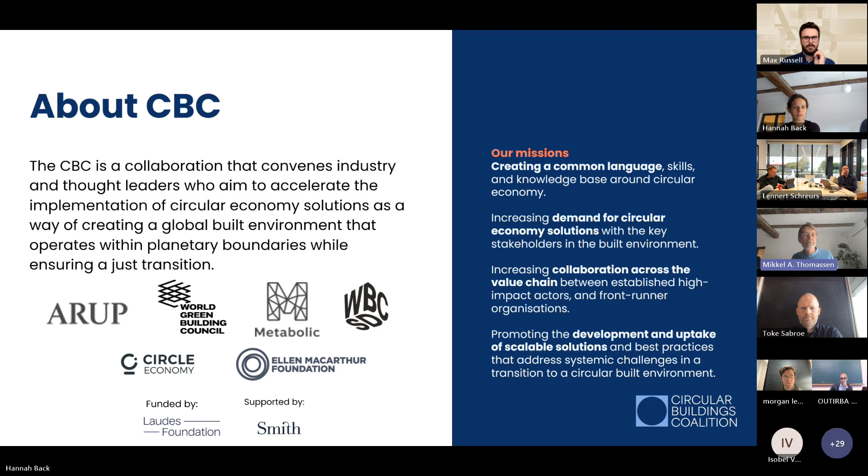If you go to our homepage, you'll see we've been trying to do this by various means. One of them, particularly prominent in the first phase of the Circular Buildings Coalition, was simply to collect data, building the argument for why circularity is important. You'll see this in particular in the 4 Circular Building Pathways reports, where we have really tried to put numbers to different strategies for circularity and how that can improve the well-being of the planet, with a particular focus on carbon.

We have also been doing reports digging into some of the harder problems to address, where the systemic challenges really get tough. So you'll also see some deep dive reports, as mentioned to the right of this slide. That is one part we've been doing in the Circular Buildings Coalition.

Another part, a very important and dear part to us, is not only to talk about the problems and give a general overview, but actually also to demonstrate that solutions are around, and very often that a lot of the assumed barriers to circularity are not necessarily real. There are actually solutions to a lot of the perceived problems, and so also instilling hope and moving things forward. It is very important for us as part of the CBC to support bottom-up initiatives, to support frontrunners, showing that there are real solutions to real problems.

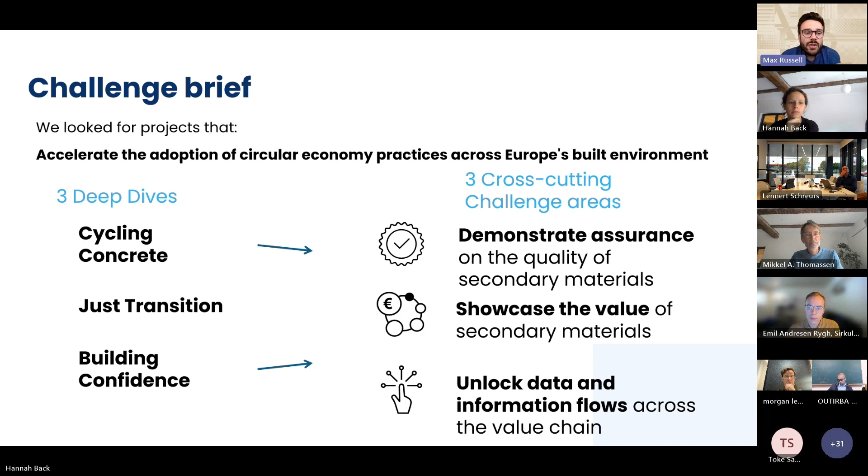Building on some of the foundational work that earlier phases of the Circular Buildings Coalition carried out, looking at material flows and other systemic barriers for circularity in the built environment, this phase we had the desire to go further, to go deeper, to really understand in more detail where some of those pressure points and challenges are. You can look on our website—we developed 3 deep dives: one based on insurance models, one looking at concrete, and one looking at the just transition.

And so through those, we consolidated and developed these open calls, recognizing that there are really great pockets of innovation already within Europe, and wanting to identify, support, and shine a light on some of the really cool initiatives doing excellent work in this space—again, really trying to help unlock circularity at scale.

So those 3 challenges that were highlighted were based on some of the research we carried out, as well as engagement with a variety of different actors and stakeholders across the built environment, to help consolidate this thinking into the open call brief that was launched at the start of this year. So as a recap of what those 3 challenge areas were, the first one being demonstrating assurance on the quality and reliability of secondary materials.

Now, this is really looking at the perceived risk of secondary materials. The question of, is secondary as good as new? What happens if the reused component breaks? What happens with that? How can I be sure? What's the assurance that I can have to ease that perceived perception on the quality of secondary materials?

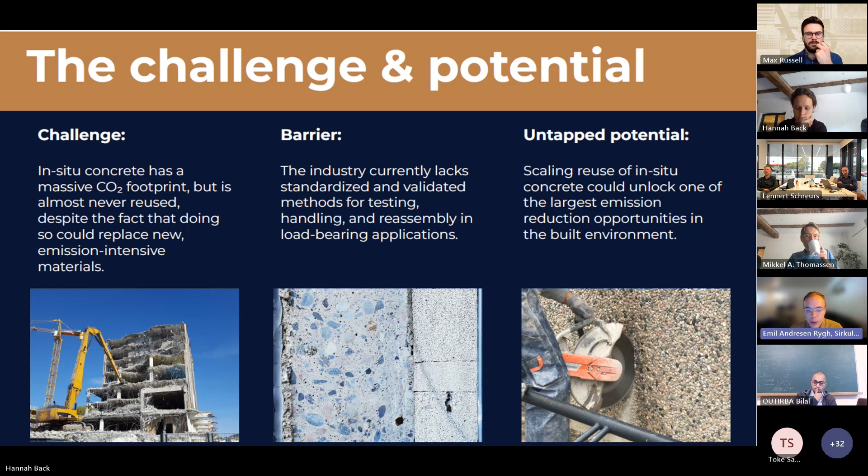Our approach is, on paper, quite simple, but in practice a bit more difficult. It's to develop a standardized, open-access framework for safe documentation and reuse of in situ concrete for load-bearing structures. Two aspects are important: the physical handling of the elements, including cutout and logistics, and the documentation procedure—at what stage and level it's done, and how we can avoid the costs related to many of the tests done today, to find a more economically sustainable way to do this process.

To do this, we will, together with experts and learning from other projects before us, try to make a method, pilot that method—both the physical and documentation parts—to see what's working and what's not. Then we'll do an iterative approach with several pilots to refine the method, to finally have it openly accessible and shared with everyone, both in Norwegian and in English.

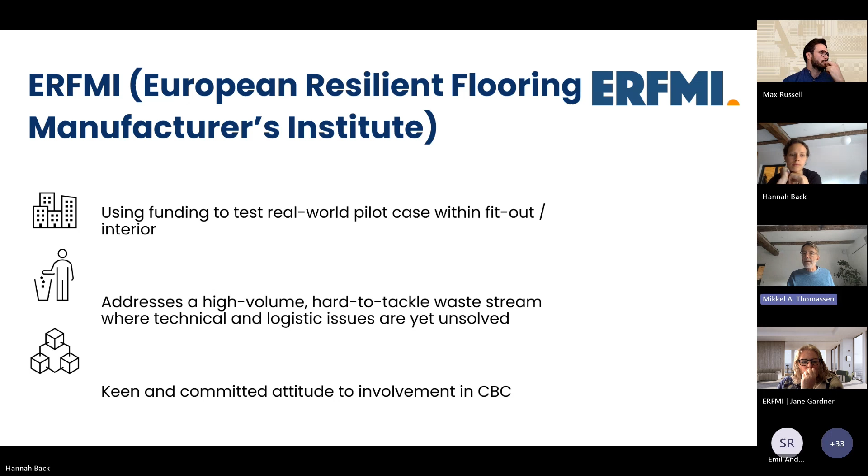Yeah, can you hear me now? Thank you very much for that introduction, Mikkel, and for sharing the reasons for choosing us. Could you go to the next slide? I want to briefly introduce who we are. We are the European Trade Association for Resilient Floor Coverings, covering PVC, rubber, linoleum, and other polymeric floor coverings. Today, 93% of what is placed on the market and already in situ is made of PVC, so that's our main focus today.

We place a large volume on the market each year, with very durable, long-lasting products with 20+ year lifespans, which is good for sustainability, but on the other hand causes issues at end of life because of the presumed presence of legacy materials - in our case mainly additives such as plasticizers that were allowed when the product was made but are not today.

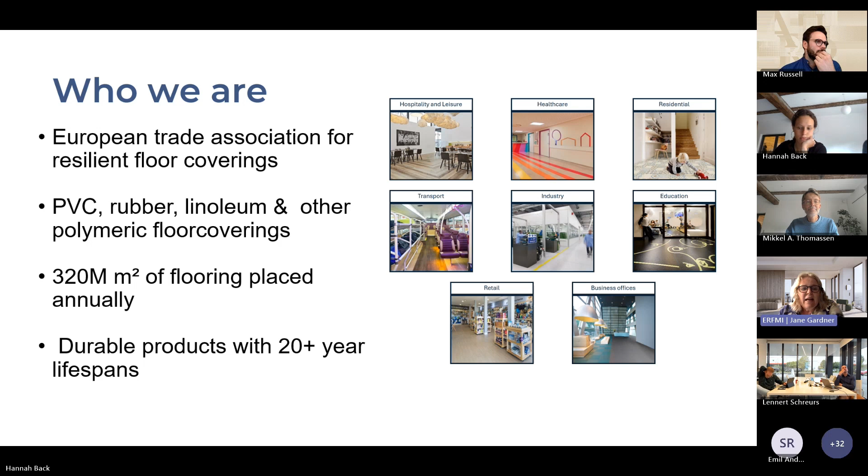If we go to the next slide, we have developed a joint ambition, which is to enable the recycling of 60,000 tons of post-consumer flooring waste by 2030. We're starting from a low baseline for post-consumer waste - well below 2%. We want to reach 10% of all flooring waste from the 2024 baseline, which is 60,000 tons.

We want to do this by developing scalable, sustainable collection and sorting models, and a hub. We're looking at a hub model where we will set up hubs in countries with high volumes of post-consumer flooring, and then, once we have a successful hub, try and expand it into other countries.

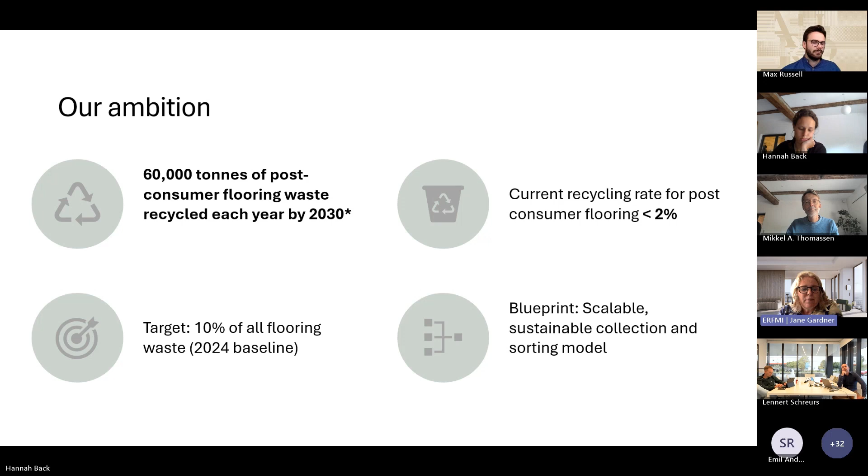If we go to our next slide, please, you can see after a lot of deliberation and investigation, we decided that Belgium was a good place for our initial hub. Multiple reasons: first, its geographic location - near the Netherlands, France, Germany, all big markets for PVC flooring. It also has a very strong background or culture of recycling, which is really important. And we have already started mapping waste flows and looking at logistics processes.

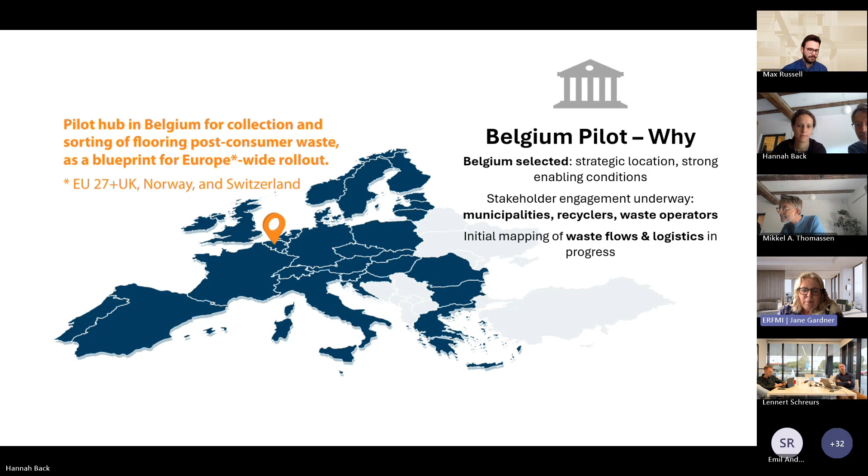So the recycling itself is feasible, but the material that includes legacy additives will have to go through alternative recycling processes, and we have looked at dissolution processes. We have successfully trialed dissolution processes, supercritical CO2 processes, and we are looking at microwave technology. Then the idea is that members use the material back into their flooring, with the acknowledgement that there will be some material we cannot use. The advantage of this hub process is that we could also trial reuse on certain products where it might be feasible. This is something looked at widely in the carpet sector, but has not been looked at, to the best of my knowledge, in the PVC flooring sector.

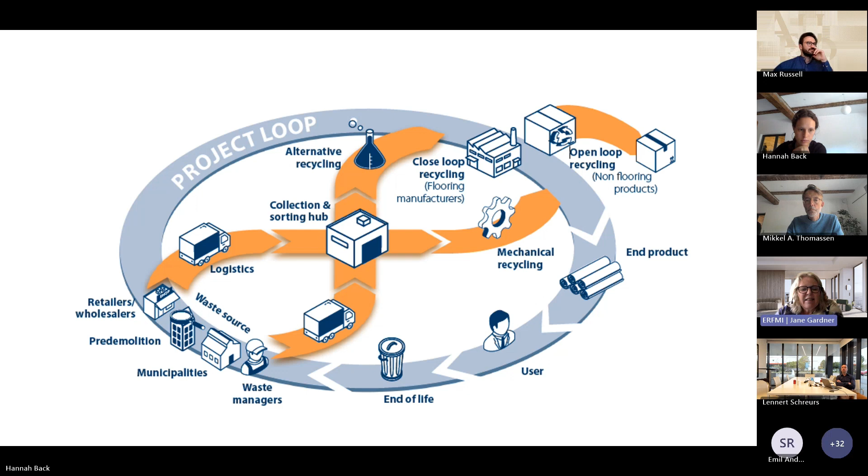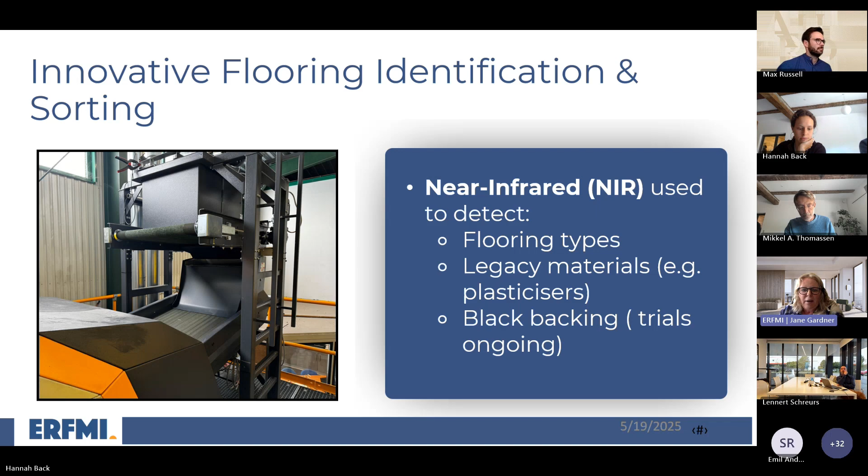If we go to the next slide, the novelty here in particular is the sorting by legacy additives, looking at alternative treatments. If we go to the next slide, we can see here a picture of the kind of flooring and the kind of technology that we are already looking at - flooring near infrared - and we can then move on.

So these are just some of the ideas, and we have 7 key steps. We are coordinating with stakeholders currently, analyzing material flows. Key to this is sorting criteria development. We know that we won't, within the 6-month process, have an automated sorting facility equipment to hand, but we will have...

We want to try it with handheld sorting first, in the first instance for proof of concept. And then by the end of the process, we will have a replication toolkit, a blueprint package with guidance models and policy input.

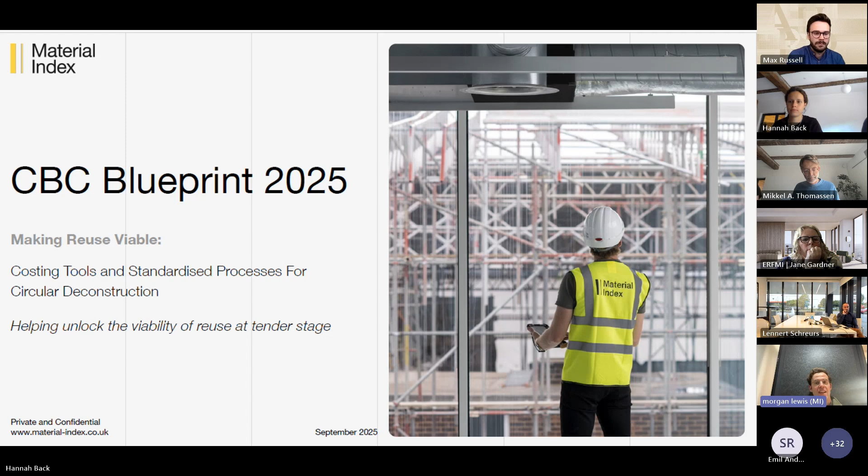So we're really interested in providing a solution at the tender stage of a deconstruction project where a building owner is looking to reclaim part of those materials from a building and wanting to know how much extra might it cost and what would the reclamation value be.

Next slide, please. This is a problem we work on a lot in a very practical way every day. We as a business provide pre-demolition audits using a digital tool. We give advice on the viability of those materials. We also provide advice to design and project teams on which ones can be reused on site. And we also broker and exchange materials, selling them to other partners who will often sell them on.

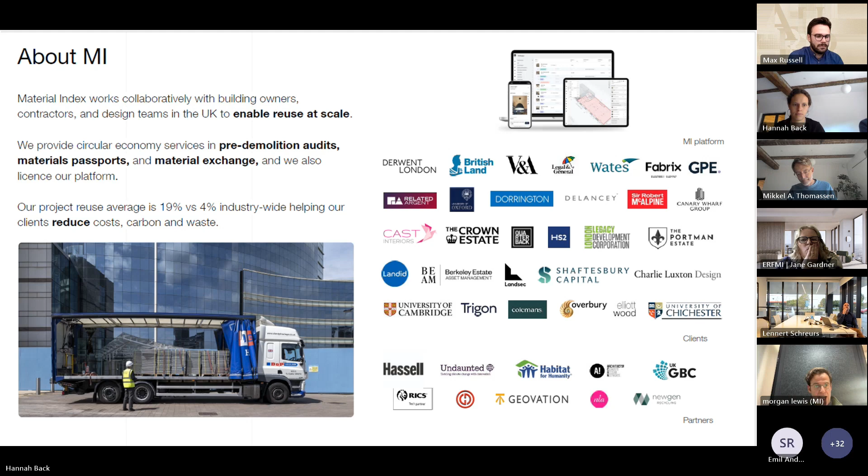Next slide, please. This particular problem is close to our heart and we think it's very important in the industry generally. We know lots of people on the call will already be familiar that a huge amount of our overall waste comes from the demolition of buildings, and we're really only currently reusing a fraction of that supply. In our experience, we're seeing between 5 and 10 times as much is economically viable to reuse than is currently being reused, and there's lots of reasons around that.

But particularly on larger projects, a really key one is the design team knowing with some level of reliable benchmarking what additional reclamation costs might be involved and values are. There is also inevitably risk with any changes to a construction process, and so dealing with this at a contractual level, like standardized contractual mechanisms, is something that we work on.

Quite a lot, and we're looking to make more public as part of this project. It's very complex, but there are sort of 3 main standard contracts in the UK, and each of them handle risk in a different way. So that's the kind of ambition of the project.

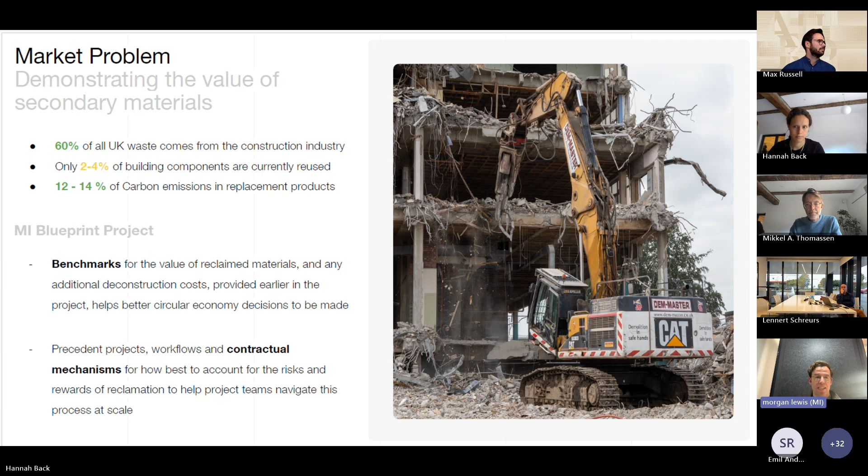Next slide, please. How are we going to go about achieving this? Well, we're focusing on residual value data sets - what are the components worth on the reclaim market, both just after deconstruction and then when they're sold on to the final buyer, since often there's an intermediary involved. Gathering that from our own projects, but also going out to the industry.

As was mentioned, I'm very keen to make this open source. It's probably worth saying that for new materials, there's large benchmark price data sets already available, and that helps the project team make estimations earlier on. Cost benchmarks are perhaps a little trickier to get, but we work with QSs and developers, and we've also set some money aside for time trials. And then of course, procurement templates, working with partner organizations there.

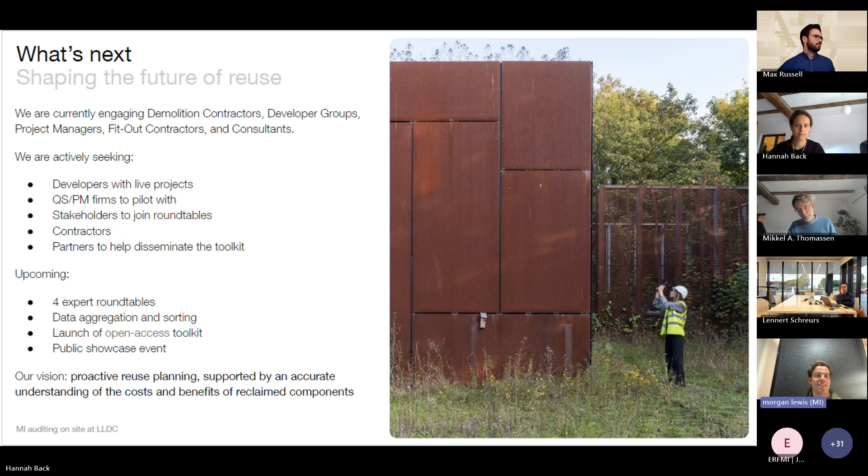Thank you so much, Morgan, for this. We all know that cities are open minded, but we need someone to start digging. So thank you for making that possible.

The next one is Biesmans Group. One thing that was quite important for us in selecting the project is not only choosing companies you normally see within this field of circularity, but also companies that have been around for a long time and really have the muscle to take ideas all the way through with a strong sustainable approach. Building as a service is something we've talked about for many years in construction, but few have managed to actually pull it off. Here we have Biesmans Group, a company owned by the one making it in the beginning, with a lot of capacity to take that idea to the very end, and also addressing another part of the building relating to roof and roof solutions. So Biesmans Group, the floor is yours.

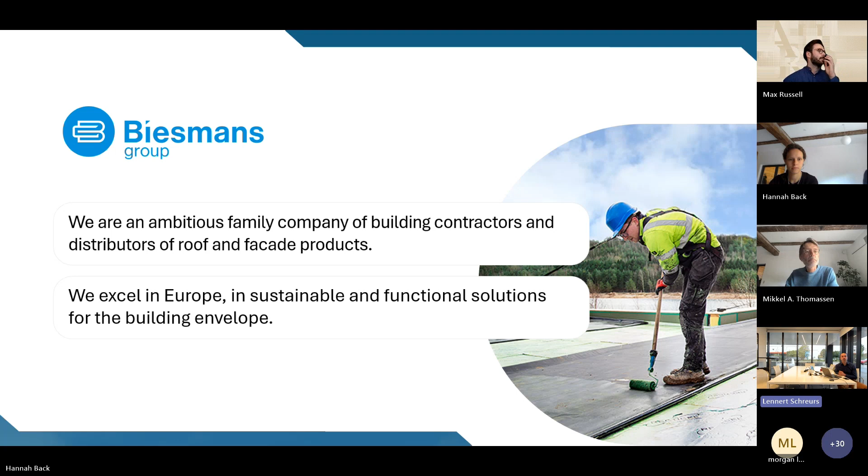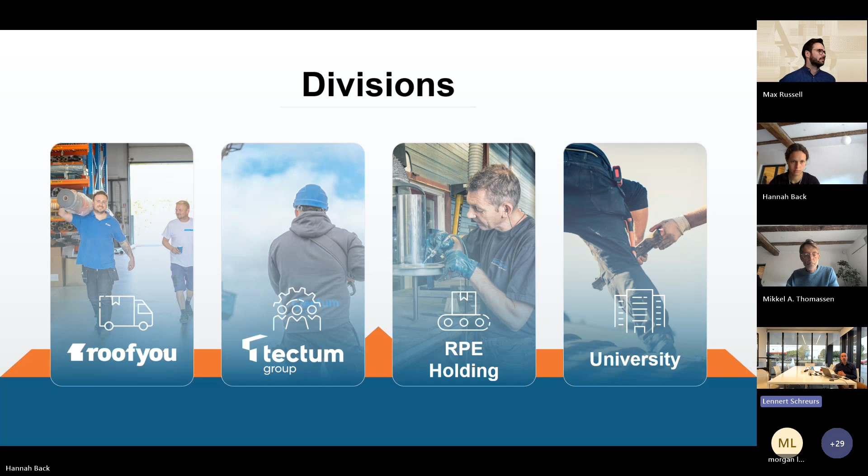We have a strong focus on innovation, and it's actually the foundation of the project we're working on today. In 2023, we released our first 100% reusable flat roof system, called a circular system. Regarding that system, we are shifting to reuse business models, and we did several pilot projects to reuse PIR insulation and EPDM membranes. We also developed some products to enhance reuse and recycling.

Some figures about our company: the family started in 1981. You can find us in 48 locations. We do around 6 million square meters of roofing each year. We have 85 years of experience due to acquisition of other companies. We are active in 3 countries: the Netherlands, Belgium, and Poland. Last year we reached a turnover of 235 million euros. We have 700 employees, and we aim for an annual growth of 11%.

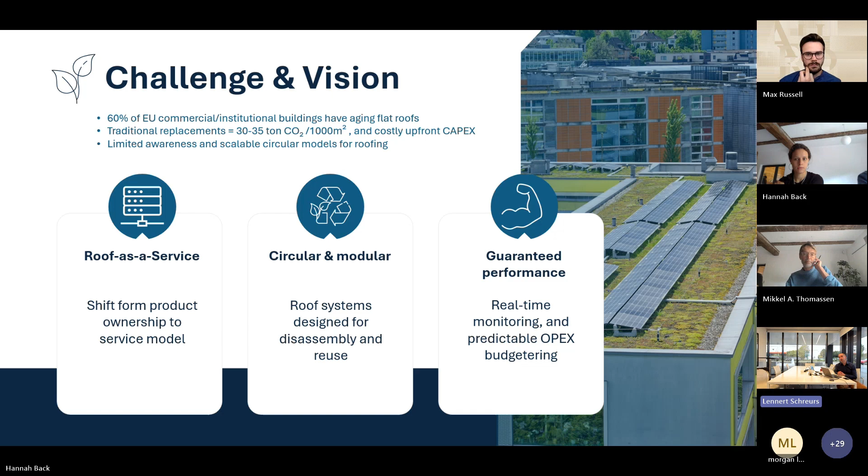The impact we want to reach is a 40% reduction of carbon emission, 30 to 50% material savings through reuse of materials, and 75% less landfill waste. We aim for 3 operational Roof as a Service pilots with a contract value of 200,000 euros and adoption interest from 5 new organizations. Our scaling strategy is a white label solution for asset managers, a circular finance vehicle to enable rapid capex-free rollouts, and shared blueprints for sector-wide systemic change. That's our project. Thank you for listening.

Thank you so much for this presentation. We stay on a similar topic as the next presentation will also talk about renovation, moving from roofing to insulation more particularly, and also into one very important aspect of circularity: the social just transition, how we can create affordable buildings and use this as an opportunity to train the workforce. We chose La Rue partly because we work with insulation, a very important product if we need to upgrade our existing building stock, and because you have this strong commitment to social aspects and local concerns, building on local communities. I think you show that it's not only about building the market, but also building meaning in a wider sense. Thank you, and I'll leave the floor to you.

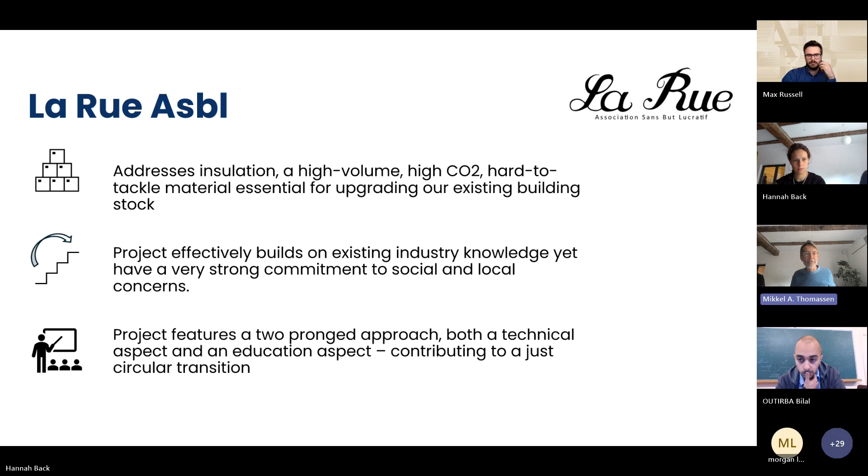Thank you very much, Mikkel, for the introduction, and for choosing us and trusting our project. This project is called Isolution, a play on words in French, with the first part being 'isol' standing for isolation/insulation in French, and 'solution' for solution. This project is carried by the French-speaking University of Brussels, the ULB, led by Professor Hendrik. My name is Bilal Outirba, and I'm also here with Mumtaz Vian, a renovation advisor from the non-profit association La Rue.

This project arises from the willingness of the Brussels Capital Region to become carbon neutral by 2050, with an intermediate target to significantly reduce emissions by 2030 compared to levels measured in 2005. We're speaking about a reduction of 40% on average, depending on the sector.

One of the pillars of the strategy is to renovate older buildings. One of the main sources of greenhouse gas emissions is energy combustion for residential and commercial buildings, which are extremely demanding in terms of heating and cooling. Renovating older buildings, which are numerous and poorly performant in terms of energy retention in Brussels, will contribute to reducing emissions.

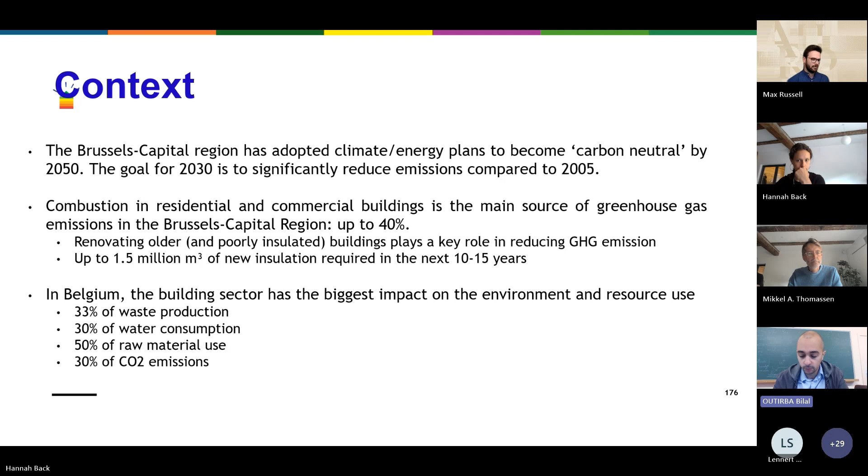This project, Isolution, has been an ongoing initiative for the past 30 months, 2.5 years. We've got an extension thanks to CBC of 6 months. The idea here is to promote the recovery, storage, and reuse of insulation materials from demolition projects at an individual level. During the next 6 months, we'll be conducting 2 renovations of buildings which will ultimately incorporate these reused insulation materials.

We've implemented the first version of the reuse process, but the idea now is to improve it, to refine the complete reuse process from dismantling to installation, but in real conditions. This means refining the design of how to install the reused materials, and improving recovery and storage to mitigate the influence of dust and humidity over time, ensuring it doesn't affect the performance of the insulation.

There's also tracking, testing, and implementation, testing with a custom-built machine. The picture at the bottom was built by ULB; the machine is quite modular, allowing us to test different materials with different typologies. The idea is to assess the thermal conductivity of reused materials, making sure the performance hasn't degraded too much from its new state.

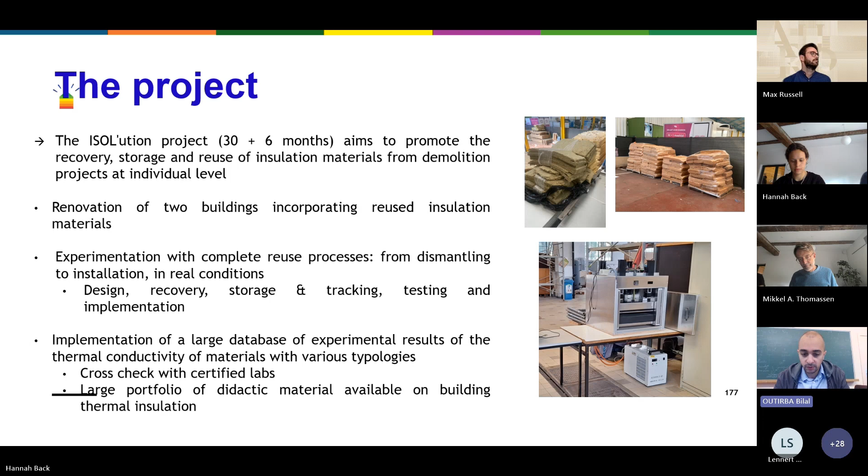At the end, we'd like to implement a large database of experimental results on thermal conductivity of various materials with various typologies. We'll cross-check with certified labs to ensure the measures are relevant. In the end, we'll share a large portfolio of didactic materials available on building thermal insulation.

The next slide shows the main achievements we'd like to reach by the end of the project. First, to show the feasibility of reusing insulation materials for a building to a large number of stakeholders. And the key here is to demonstrate the good performance of reused materials, thanks to the machine, but also thanks to the whole process that we need to validate in the end.

Another layer of the project is this social anchoring, because the buildings that are targeted are dedicated to low-income households for two reasons. The first is that they simply cannot afford the renovation project despite some incentives from the Brussels Capital Region, so it's still a bit hard to access, but also because of the high prices of energy since 2022.

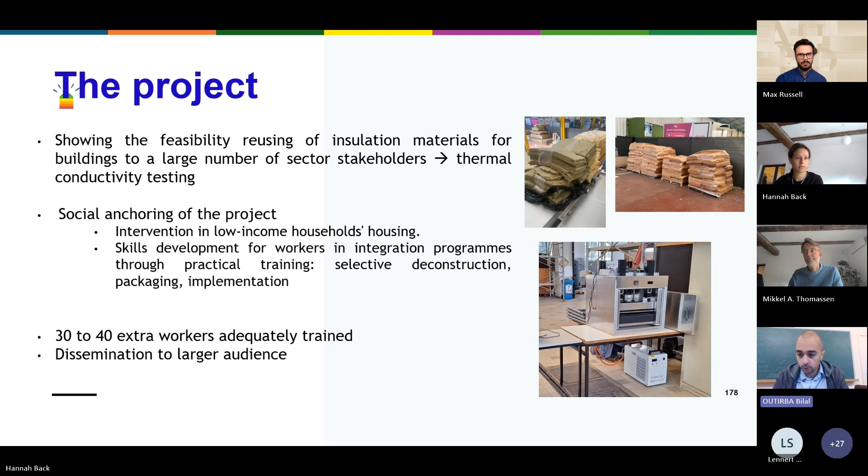The second aspect is the training of workers who are willing to be integrated into society. Some of the funding will be dedicated to training workers in practical skills about selective deconstruction, packaging, implementation, and generally all the good practices to deal with insulation and reuse of insulation. We target 30 to 40 extra workers by February. At the end, we also want to disseminate our results to a larger audience of specialists from the sector.

A small word about the team. ULB has designed the machine and they will take care of the tests. We also coordinate the project within the stakeholders.

La Rue provides guidance for owners on practical and financial aspects. They will select the construction sites, renovate, and also supervise the construction sites.

Casa Blanco, the third one, will actually perform the work within the construction site and also provide the trainings for the workers. Batiterre are the suppliers of reusable insulation materials, and ThermalPlug is a spin-off with whom we have an industrial collaboration.

They have, for example, helped us in designing the machine and provided the relevant sensors to make sure that the machine performs the tests accurately. So we are a team of five stakeholders, and I will end the presentation with the next slide.

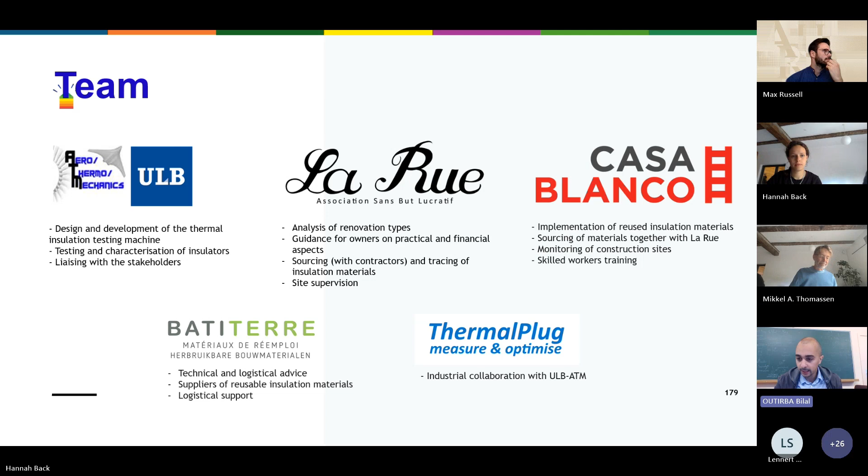Thank you very much for listening, and do not hesitate to reach out to us if you are dealing with insulation materials, and if there's any way to collaborate and share the results, we'll be more than happy to do this. Thank you very much.

Thank you, Bilal. As we said in the beginning, CBC is very much about not only creating more supply, but also creating greater demand. And if we learn one thing, it's that to increase the demand, you have to reduce the risk, and to reduce the risk, you need some kind of assurance, and for that, you also need insurance on board. So Toge, we were really pleased to see your application working out of Denmark, looking at the insurance aspect, but also with the ambition of learning from and contributing to solutions outside of Denmark, and building on the market structuring platform you have already made in your organization. So please, Toge.

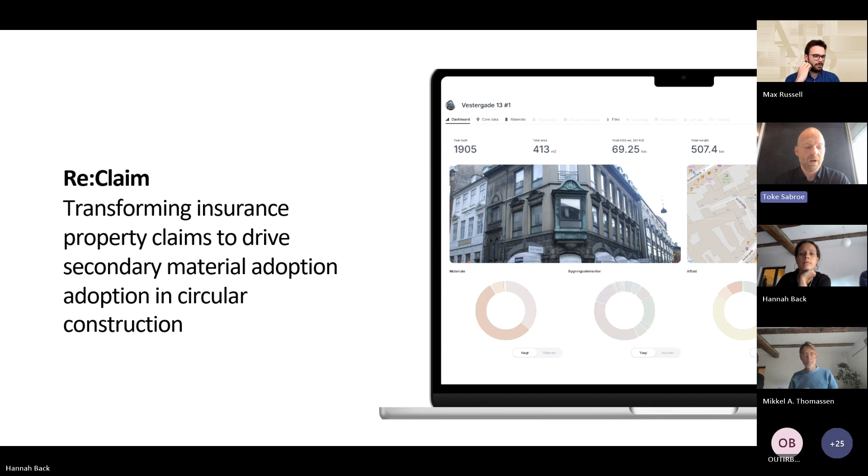Apart from Circue, who will be the lead, we're working together with the Danish company Rethink Strategy, who are strategic business development experts in the insurance industry. We will also be collaborating with insurance industry partners to ensure strong market relevance, in particular P&C - property and casualty - insurance providers, as well as professional service companies who deliver claims management experts and really understand this market in depth.

Within the focus area that I briefly described around the claims management process, what we are looking to do in more detail is to shift this new-for-old insurance policy to a like-for-like approach. Basically, introducing secondary materials into the claims management and repair process. Hopefully, over time, making secondary materials a new industry standard in claims repairs.

We know well that this is not an easy task. It's a complex, if not systemic, challenge that's related to legislation, to data and assurance on data quality, and to consumer behaviors. What we're trying to do with this project is identify core incentive models that will allow insurance companies to start working with this, and also engage their customers around how this can function. We know from communication with at least the major Nordic insurance companies that this is very much on their radar and something they're interested in engaging with.

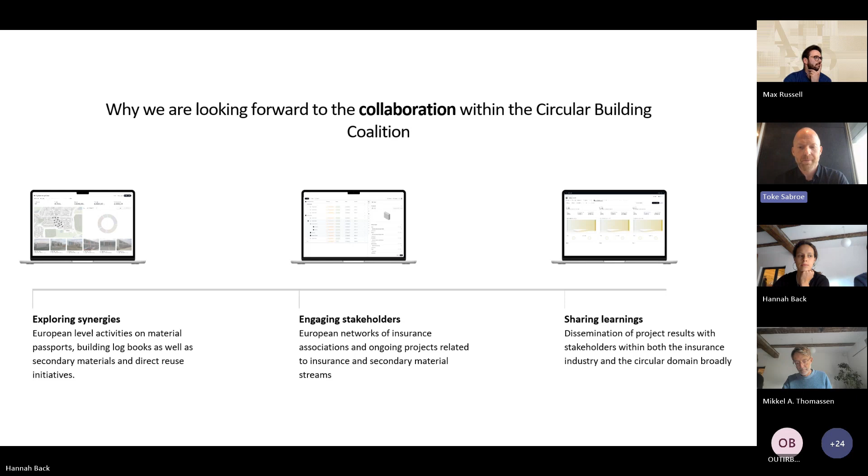The insurance industry, even though there is European level regulation, is also very much nationally regulated. So having that dialogue around how this translates, how it becomes adapted in various regions and markets, is of course important.

If you have any insights, are interested in conversations around this, or know of cases or data we should be aware of, please don't hesitate to reach out to either Lene Brex or myself. You have our contact information here, and we'll be very happy to have further conversations on this. Thank you again for bringing us into the Circular Building Coalition.

Thank you, Toke, for your presentation and your speed talk. We're approaching 4 o'clock, I guess you kind of knew that. It's always like the painter on the building site, the painter has the least time, so thank you a lot for that.

I think we're going to conclude now since time is running and it's 4 o'clock. But as Toke was saying, the whole idea with having this celebration is not only to celebrate it, but also to provide the platform so people can reach out to each of the organizations if you have shared interest. And of course you can also reach out to us at the Circular Building Coalition, addressing us here at Smith Innovation, and we will also get in contact with the other core partners of CBC and all their network.

So thank you for being part of this, thank you for the contributions, thank you for listening. I think the unique part about CBC is that it's working across Europe, but still with a very solution-oriented, bottom-up approach, and I think that is a unique and much needed voice for the time being. So thanks a lot, all of you, for being here today.